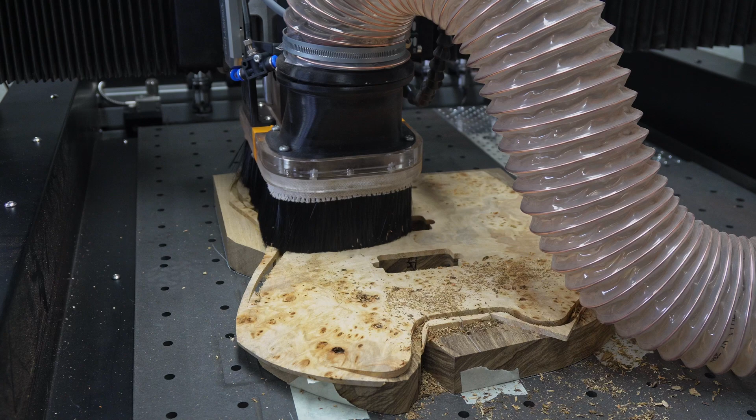Today I want to take you through my process for cutting one of my guitars on the CNC. I'm going to start at the very beginning, cut step by step, and especially focus on the cam, like what kind of tool paths that I'm using, what tools am I using, how fast am I going, and all of this I am doing, of course, on my brand new CNC. So this should also give you a bit more of an idea of what this machine is capable of.

I'm going to start off with the body blank. I'm going to cut the arm bevel for it so that I can do the bent drop top that I like to do on it. I'm going to show you how I do that. I'm going to glue that up, machine the rest of the body. I'm going to machine the neck on both sides, as well as doing the fretboard with all of the inlay.

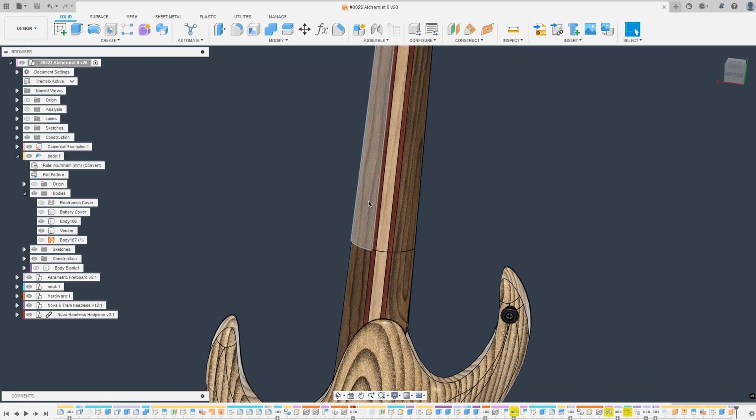So this right here is the guitar we're building. It is quite similar to the one I built here on the channel fairly recently, except this time it's going to be a 6-string version and we have a poplar burl top instead of a buckeye burl top. Other than that, we also still have a black limba body, and this time the neck will be with some walnut, padauk, and some nice flame maple. Now, all of that doesn't really matter for the cam strategies here, but I thought I'd just share with you what we're building.

What does matter a bit more is that we're using a tremolo bridge. This one here is from Nova Guitar Parts, and I'm also using their block headpiece. Usually I like to use the single headpieces, but the customer for this guitar requested this different headpiece, so that's what we're using here. And that's why also the headstock here looks a bit different than it does usually on my guitars.

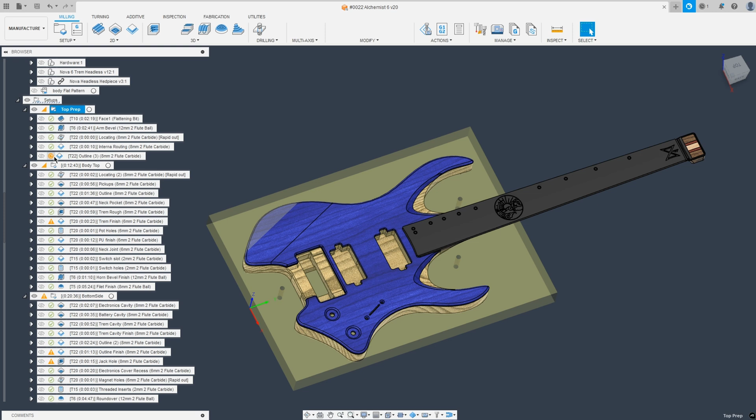Now I'm going to start off with the body and then move on to the neck and the fretboard after that. So let's hide the neck, and the very first thing is that the top here is not on there yet, and we want to prepare the stock body with all the internal things that will later be covered by the top, as well as with the arm bevel. I like to do a bent top here that follows the arm bevel nicely, and this means that I don't get an ugly line here and the beautiful top is seen everywhere.

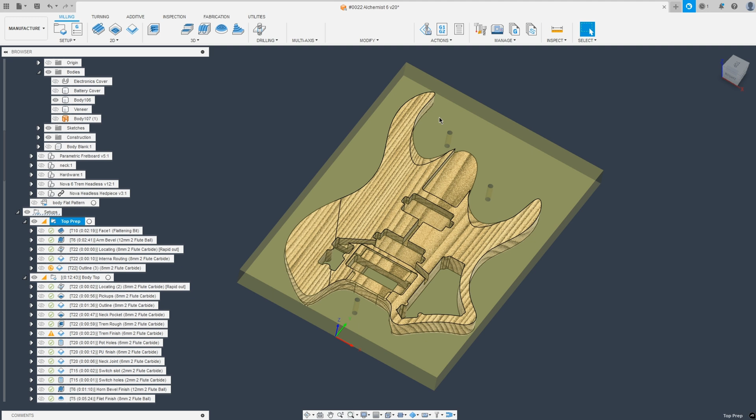So here, this is my first setup. I have defined the stock here as a separate component with the body, and this means that I get exactly what I need, and I can also have the locating holes, for example, defined in the stock, and it's just a lot easier to manage than using a fixed size box stock in here.

I'm starting off by facing the stock to thickness. Sometimes I do that separately before already. In this case, my stock was still a bit too thick, so I'm using a big 2-inch flattening bit here, so roughly 50 millimeters. This is really nice at getting a nice even flat surface, and it's pretty quick. Now you do want to make sure that your spindle is nicely trammed, otherwise you will get some step over lines, but here this works great for me, and this is definitely an operation that kicks up a lot of dust if you are not using dust extraction.

If we look in here, the spindle speed is of course slowed down quite a bit. This is a huge bit. Now even at 12,000 RPM, the surface speed is a lot faster than I usually try to aim for in wood. However, this bit claims to work up to 15,000 RPM, and I haven't had any scorching issues running it at this speed. But this is definitely something I want to keep in mind. And then the feed rate I have at 5,000 millimeters a minute here.

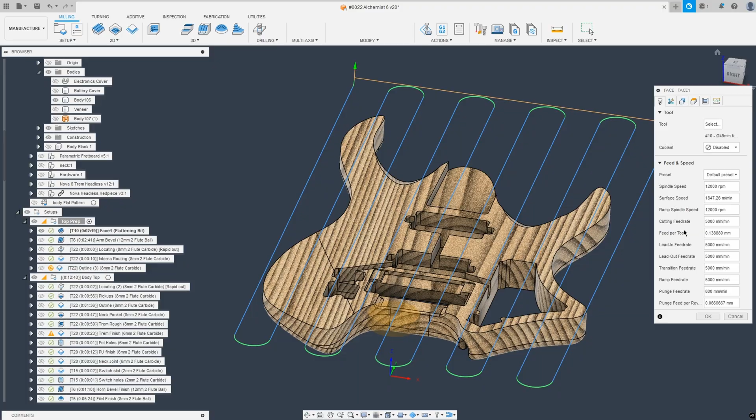I'm sorry if you work in inches per minute, but doing every single conversion here would just take forever. So if you want to follow along, it's probably easiest if you open up a millimeter to inch conversion in a separate tab.

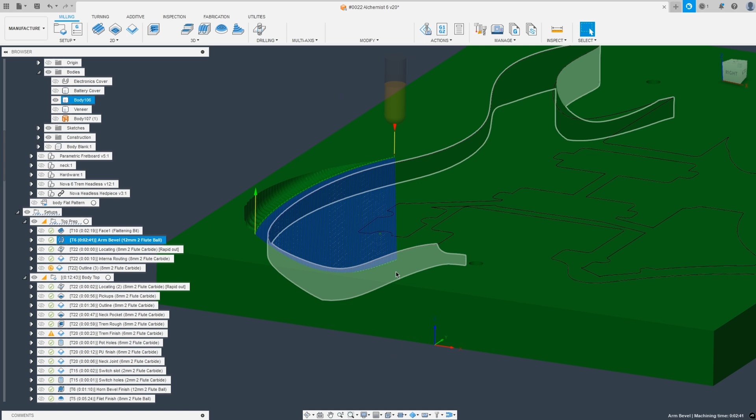Then for the actual bevel here, I'm using a parallel strategy with a 12 millimeter ball end mill, and this is just the easiest way that I've found to nicely step down. I'm doing very small step overs, so I don't have to rough anything out before, and it's a very even engagement as it continuously takes more material.

Now the main trick here is getting it to extend past the body shape, as I haven't glued on the top and I want to have a bit extra that extends nicely so that I can glue on the top, have a bit of overlap where it still glues on nicely and it follows the curves.

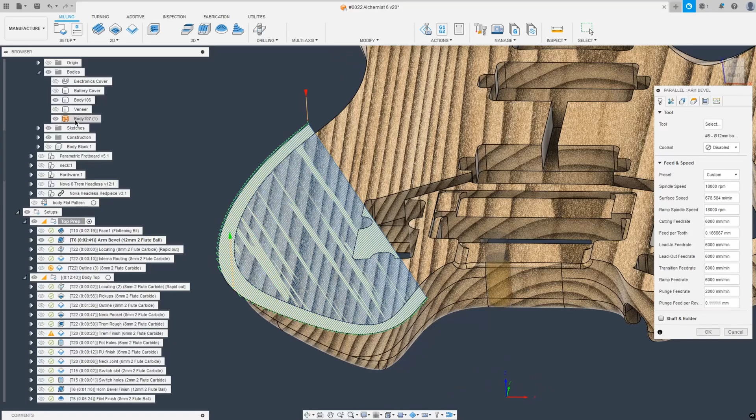Now to do that, I created a separate surface body. There's a couple of ways that you can do this. The way I get this curve in the first place is I have a sketch here that's perpendicular that I then extrude out to make the cut for the top. And I use the same sketch to create a surface body, and then use an outline sketch from the top to cut it to the shape. And it just has a bit of an offset.

Then inside of the parallel here in the geometry, I'm using the face contours of this separate surface, and I'm also using the model tab, as this body here is not one of the models of the setup. I'm including it here as the model, and this will make sure that the tool doesn't drop down off the edge. For the step over here, I'm using 0.75 millimeters.

This of course does leave some step over lines, but I can just sand those off very quickly, and this also makes sure that when I'm stepping down quite deeply here in the end, there's still not too much load on the tool at all. Then for the RPM and speed, I generally want to aim for around 550 to 650 meters a minute for surface speed. And this basically dictates the spindle speed based on your tool diameter. That's how I arrived at this speed, and that also means that the smaller the tool, the faster your spindle speed will be.

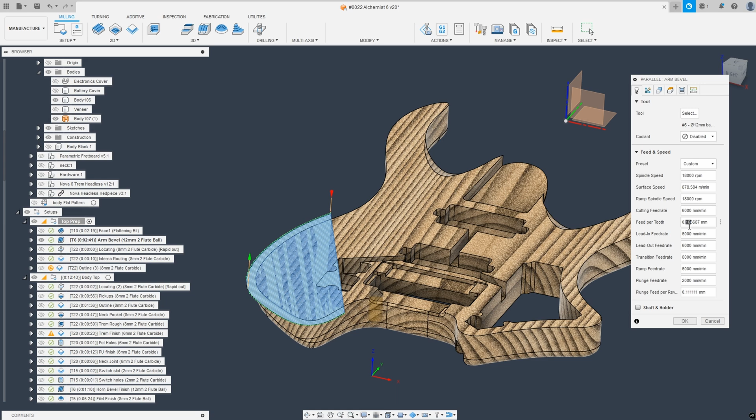Then for the cutting rate here, for wood, something in the 0.1 to 0.2 feed per tooth range is usually a safe bet. Stay maybe on the lower side if your machine is not as rigid. And then this is how I arrive at the feed rate.

After that, I'm switching to an 8mm end mill, just doing a small little drilling operation here. This gives me a hole that I will later use when I flip it over as well, but mainly for the next operation after I've glued on the top, this will be my zero point, and I can simply probe that in, and this is the easiest way to get a precise reference.

Now, it doesn't matter that I'm exact down to the micron here. If I'm within a millimeter or so, this is perfectly fine, as everything here is still oversized. I'm cutting nothing down to dimension. And even once I'm doing the internal routing here, if these routes are slightly off by half a millimeter or something, that is still perfectly fine, and you won't be able to tell.

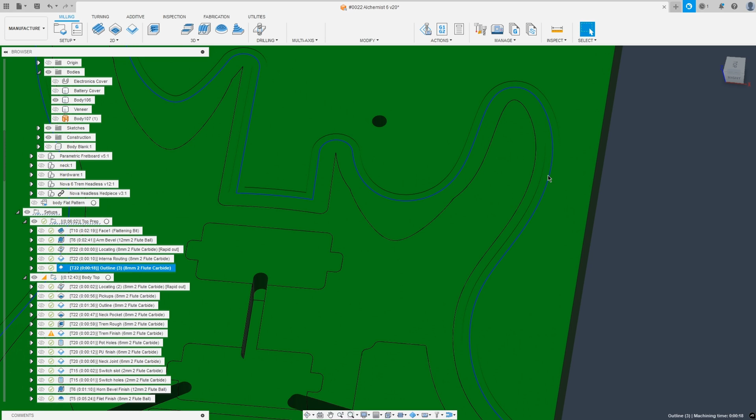Now, this outline is not following it directly, but it's mainly here as a visual guide of where I want to glue on the top. This way I can ensure that when I glue on the top, if I am covering this everywhere, then I know that I won't have a piece missing somewhere. And there's, I think, a 5mm stock to leave here on the radial, and this is just a guide that helps me line up the top, but completely optional.

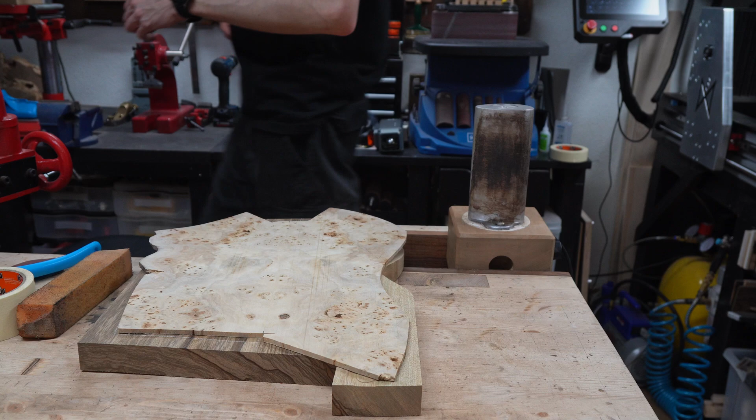Then after having machined all of this, take it off of the machine, do some light cleanup. I use the bandsaw to cut away the excess material where I will attach the bent top. And to bend the top, I'm using just some heat and steam. This I'm doing with an acoustic guitar side bending iron, but there's all kinds of different ways you can do it. Depending on the wood, like in this case, the poplar was so soft, I could have probably gotten away with just using some water to soften it, then clamping it in place, or even just forcing it in the vacuum bag. But there's a chance of cracking, so I prefer to do it with water and heat.

But if you're doing something like maple, of course, then it will require quite a bit. My tops are 5mm thick, which I find I can bend even maple still fine at 5mm. Any thicker than that, and I'm going to have a problem having it follow the curve. But I think 5mm is a nice thickness anyhow.

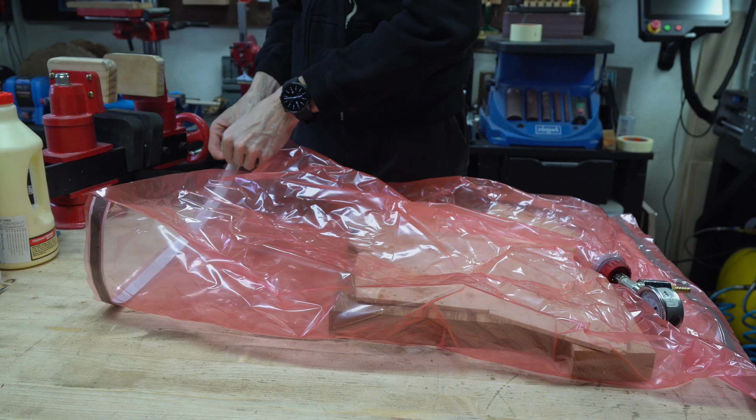And to glue it on, I'm using a vacuum bagging system here. I used to use a clamping caul, and that also worked. It's just a lot more convenient and faster with the vacuum bag, as I don't have to set up a caul and put on 20 different clamps. But if you don't have a vacuum pump, then a clamping caul will work perfectly fine as well. Then after that glue has sufficiently dried, I can move on and cut the rest of the body.

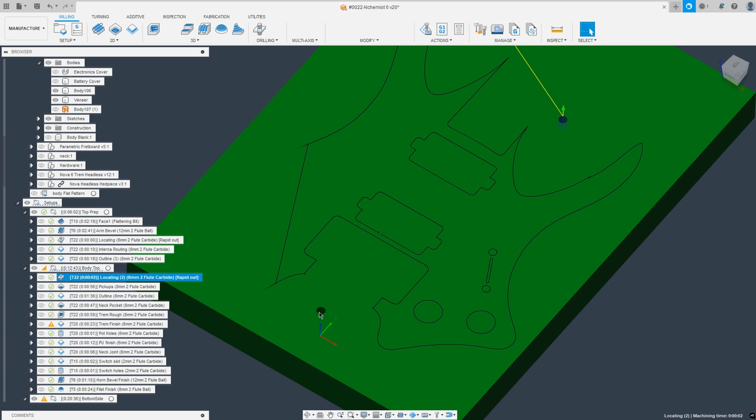So here, starting off on the top, I'm cutting the remaining locating slots and locating holes. I usually try to make sure that, well, this one down here is of course not covered. And the way I'm making sure that this is still square to the machine, since I'm only taking one location here, is I just use one of these edges as a reference, and in case I cut that edge off, I align it manually using the center seam if I have a two-piece body or something like that.

Then I move on to cutting some of the cavities. Let's have a look at just one of these adaptive operations, as they're essentially mostly the same everywhere. I'm using an 8mm 2-flute end mill here. I might switch to a 3-flute at some point. I just haven't gotten around to changing it out yet, but I got one. This will just allow me to go even faster, but usually these adaptives are quite fast anyhow, and are not the limiting factor of how long the operations take. So that's why I also haven't gotten around to it.

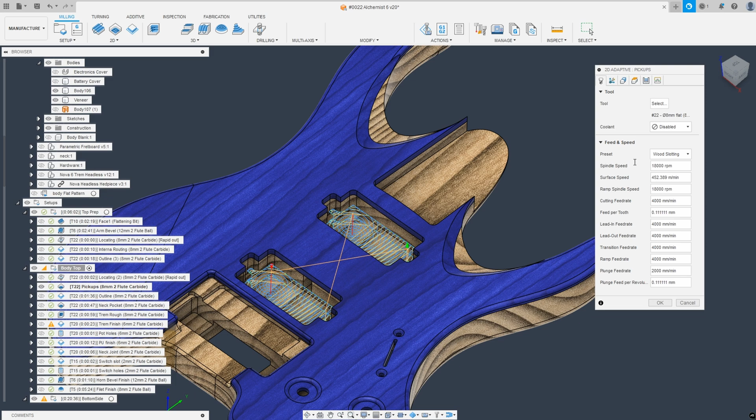Now for the feeds and speeds for my 8mm mill, I have two different recipes. One is for adaptive, where I'm just taking a side load and it's not fully encased in the slot. Here I'm going a bit faster, 20,000 RPM and 5,500 millimeters a minute. And then if I'm doing a slotting operation, I just slow everything down a little bit, and this just results in less load on the tool. It doesn't scream quite as badly. Since I need quite a bit of stick out on this tool to be able to clear all the way down, I can get some chatter and some screaming if I do slotting. That's why this is a bit slower.

Then I'm just doing multiple depths. Usually I like to do around 10mm step downs. That works quite well. And a stock to leave between 0.3 and 0.5 is what I usually like to do. Here I do a bit more on the higher side, 0.5, as later I'm going to come around, clean up the edge, and there I'm going to use a downcut end mill. This tool here is an upcut end mill, and it can result in a little bit of tear out. So if I have a bit more here, there's more meat left to remove the tear out.

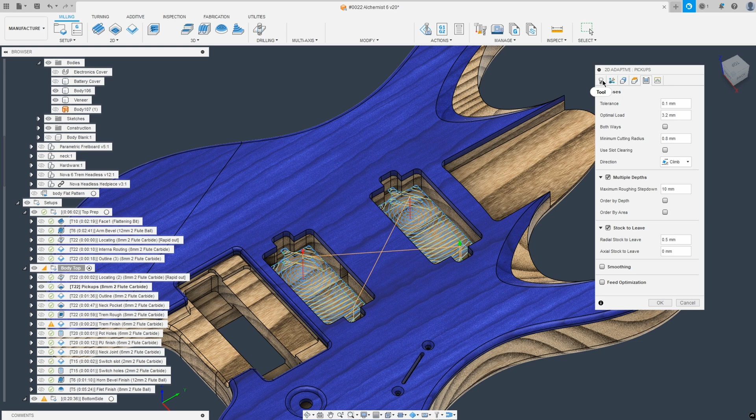The 3-flute end mill that I might be switching to is a roughing one with straight flutes and some chip breakers. I don't want to use a downcut end mill for this kind of bulk material removal, as it just packs down the chips a lot. I like to just have all the chips fly out easily and get removed. So straight flute might be a good compromise to minimize tear out while still getting all the chips out.

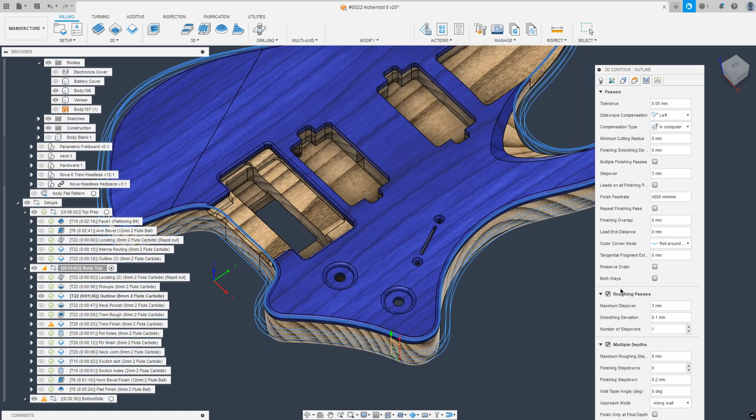Then, before I can continue with the other pockets, I'm actually cutting the outline. I'm not cutting all the way through yet. That will be once I flip it over. So here I have a bit of stock to leave. And what I'm also doing is I'm taking a roughing pass. This is not to get a nicer finish, but just to widen the slot and allow for all of the chips to come out.

Now, if you cut a slot that is very deep like this, the wood chips tend to not want to fly out. This was mainly relevant when I was still using a 6mm end mill on my Killer Bee, as I wanted to be able to get everything done with one end mill and not have a 6 and an 8mm. There the slot was even narrower, so having these roughing passes was absolutely necessary. Here with the 8mm end mill, it might not be strictly necessary anymore, but this also gives me a bit more of a gap later when I come around to do some of the roundovers with the ball end mill. So I'm doing a 3mm step over for the roughing passes and going down 2 step downs of 9mm each.

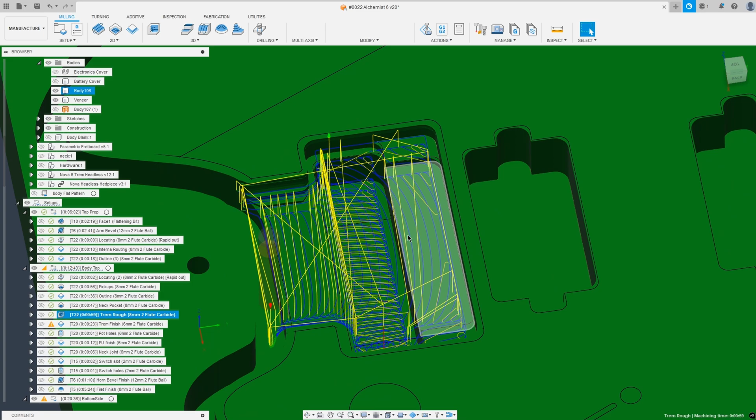Then this gives me enough access that I can do the adaptive operation here, and I can just come in from the outside. I can just rapid plunge here and cut away the neck pocket. Then I do the same adaptive operation here. Now it's a 3D adaptive that is just constrained to this area and set to only go down as far as it needs to clear everything from this side. And then I will go through all the way from the other side.

This is all still with the 8mm tool, and then I'm switching to my 6mm downcut tool to do all of the finishing. This can also get into all the corners. All of my corners here I have designed with a 3mm radius, and this means that I can get in there.

Now, if I needed tighter radii, I could of course use a smaller tool, but for basically anything I do here, 3mm is perfectly fine. So that just makes it easier. Then I also cut the holes here for the potentiometers, finish the pickups, the neck joint.

Then I switched to a 2mm tool to cut the slot for the blade switch, as well as the holes here. I stopped doing the chamfers here on the machine, as it is easier to just do those by hand with a nice tear-out-free countersinking bit.

Then final things left to do are the 3D stuff, the surfacing. So starting off with these bevels here on the horns. Now I'm using a 12mm ball end mill here, the same one that we used before to cut the arm bevel. And once again, parallel strategy, and I'm also not pre-roughing this here.

I used to rough all of my finishing strategies with ball end mills on the Killer Bee, and if you have a slightly less rigid machine, that might be a good idea to come in here with a 3D adaptive first to get the bulk of the material away and only finish with the ball end mill.

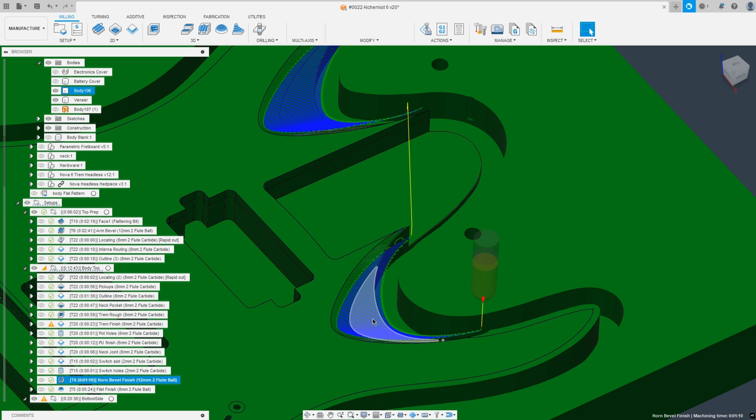But I find with a parallel toolpath, these are very predictable, and you can have a small step over and you're not actually taking a lot of load, and it is a slow and gradual ramp up and ramp down. So this works out quite well for me, and I get a pretty good finish right off the bat. Then to do all the roundovers around, I'm using a scallop toolpath.

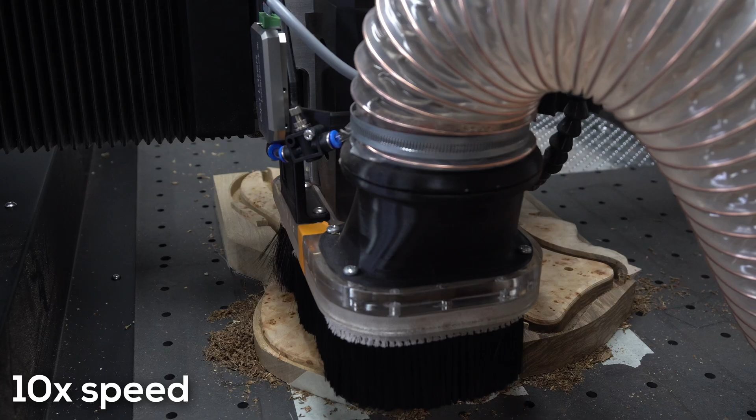I'm also using that to do the recesses here for the knobs, and that just saves me a lot of time later for sanding. Now, I will refine these curves and sand them into a perfect shape, but it just gets the job started.

Flipping over to the bottom side, I am now using all of these holes that I drilled previously to align it onto my CNC. I have a 50mm grid set up with 8mm holes on my CNC, so I don't have to actually drill any new holes here. I made sure that these ones are also on a 50mm grid.

That means I can just use dowel pins, probe the hole that aligns with the one here beforehand, and then flip it over and align it with these pins. And that gets me to a repeatability of like 0.1, 0.2mm fairly easily.

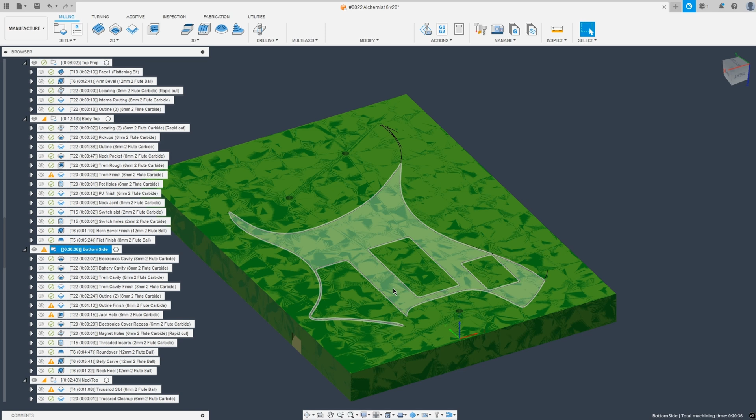If I needed something more precise, I could build proper fixtures, but since I left a bit of stock to leave here on the contour and everything else, like woodworking here, I'm gonna sand everything later, so like 0.1, 0.2mm precision is more than enough for me.

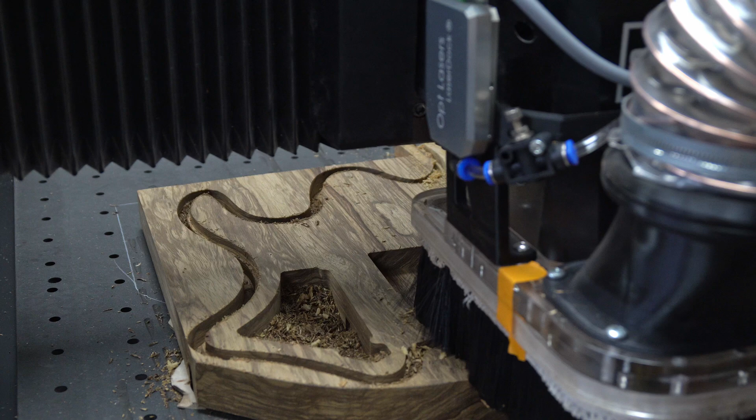On the other side, it's basically more of the same, starting off cutting out the bulk of the material with some adaptive roughing strategies. And same thing for the battery and the trem cavity. Then doing some of the finishing. And then I cut the outline now from the other side also to roughly the middle point. And this now frees the remaining stock around.

So, by the way, the way I'm holding on to this after I flipped it over is the same as always. I'm just using masking tape and super glue. So I apply the tape to the piece, make sure to burnish it down really well. If you just lay it down there and lightly press on it, it doesn't hold nearly as well.

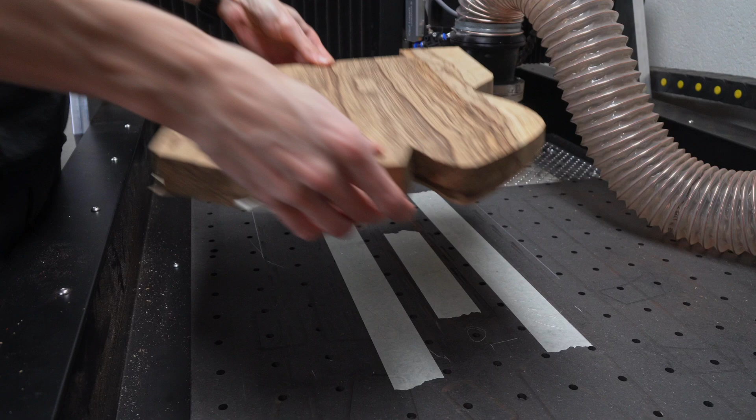You want to push on it either with a tape roll or with a separate roller and really push it on there, and then it actually sticks really well. You also have to, of course, make sure that it is flat, but we surfaced this surface here beforehand. If you just get a body blank in, they might have a slight twist to it, and then this tape thing is not going to work really well, as it might not lay perfectly flat on your CNC bed.

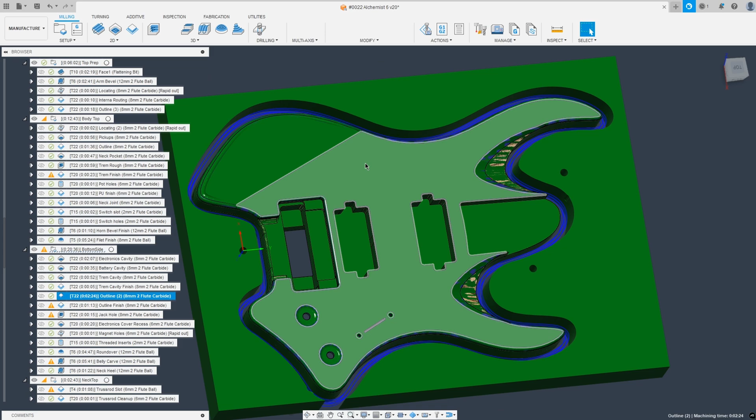Now, when I flip it over, there's a lot less surface area that will be contacting it, especially after I remove the outsides. So I usually get a nice tape strip in here around this area, and one in here, and sometimes in the middle. I found this works well enough. Some people like to leave tabs, but for me, I haven't really had any issues of it popping up, except one time, but then I did not flatten the top and, well, paid the price for it.

Then after I do the outline, also the same roughing strategy, I go around again in some coarser step downs and do the finishing passes. This now goes basically all the way down. I leave like a couple millimeters from the bottom since I have this fillet here anyhow. This just means that I don't have to cut into my spoil board.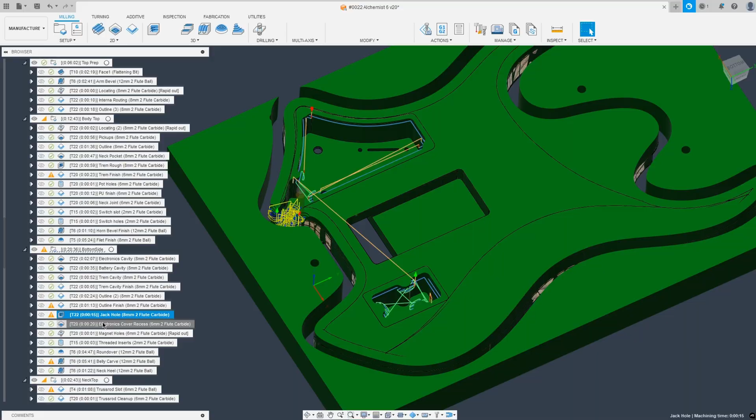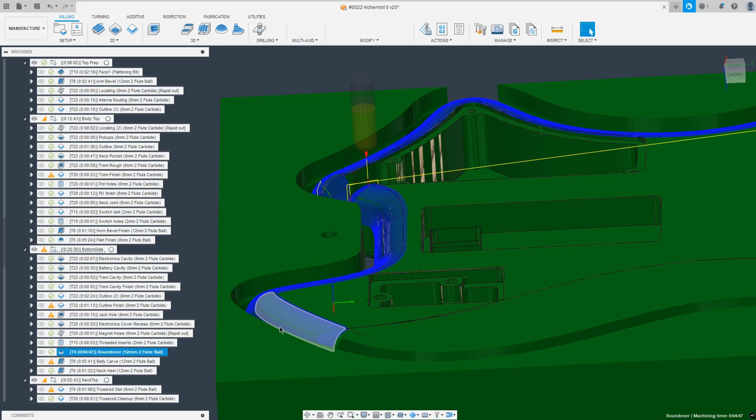Then finishing up some other housekeeping items. The little recesses for the covers here, drilling the holes for them, and then doing here the bigger roundovers. Now here I'm again using a scallop toolpath, and with scallop you want to do a roughing beforehand if there is more material that you want to remove, because it kind of goes all over the place. It starts from the outside and just kind of top and bottom and wherever. So you might all of a sudden take a lot more material in one pass than you intended to. This is kind of just on the edge of what I want to do. Otherwise, I would do a 3D adaptive before.

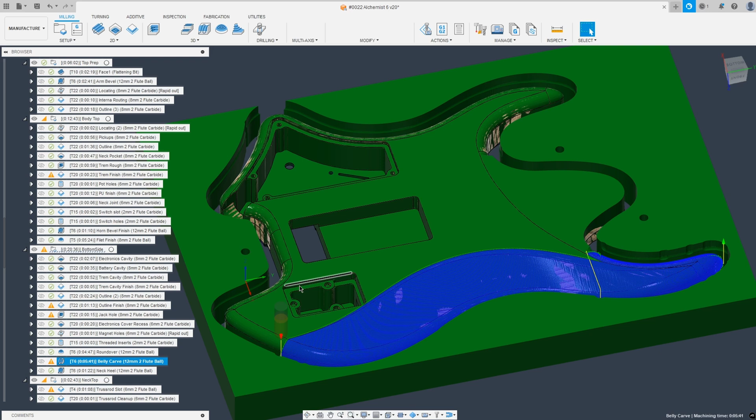I used to use the scallop for all of the different operations here, also for like the belly carve and everything. But I found that these corners here where it changes directions, if that is a concave surface that it is on, it can leave some little dimples from changing directions that are hard to sand out. So I'm just doing this scallop here on stuff that is kind of all over the place, as it is the simplest one to just constrain, just select what I want and it does its magic. Then for the nicer surfaces here, I'm using once again a parallel toolpath. This leaves a much more consistent finish that is easier to sand out.

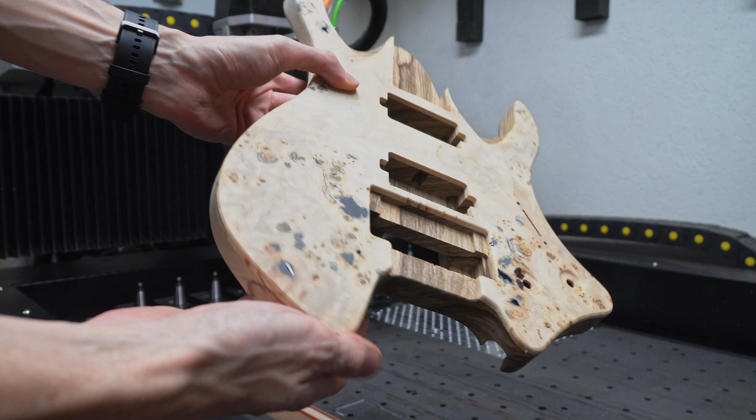Now you can also see that these finishing strategies in terms of time make up the majority. Like half of the time cutting here is just these surfacing strategies. So choosing the right step over, doing the trade-off of how long it takes on the CNC versus how much sanding it is, can save you some time. I do fairly fine step overs here, especially considering it's a 12mm tool. But then here for the heel, which I carve more by hand anyhow, I do a significantly coarser step over just so it goes faster, and I will sand all of that by hand anyhow.

And that's basically it for the body. Now I have the body completely freed. I take it off the machine, admire it, and there's of course still a lot of sanding left to do, final shaping of everything, but that is the matter for a different video. Then moving on to the neck.

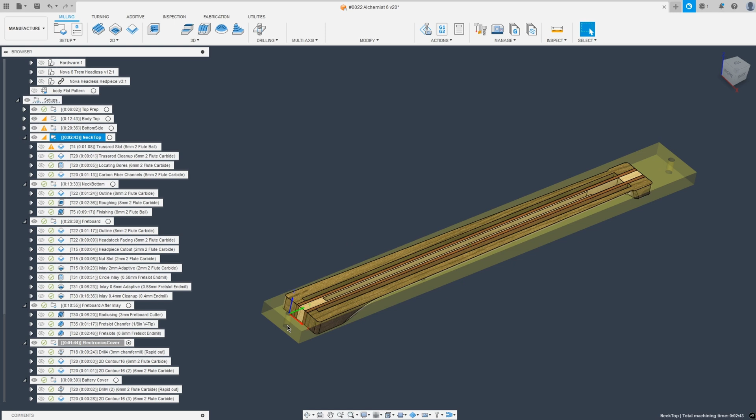I'm already starting off here with a prepared neck plank that I made ahead of time. It is for me 18mm thick, and then the width and length is just so that everything fits in here. So here I glued it up from the different materials and then used my drum sander to get it to the perfect thickness.

Then here on the top side, the main thing I have to do is a truss rod slot. For this, I'm using a 6mm ball end mill, and the reason why I'm using a ball end mill and not a flat end mill is it just leaves a nice radius on the bottom inside of the slot, and most truss rods, at least the ones I'm using, are round, so this just leaves more material there that otherwise just makes it a lot thinner. My necks are very thin, and there is not a whole lot of material left, so if I can keep a little bit more material here in the corners and strengthen the neck up more, that is a good thing in my book. That's why I'm using a ball end mill to cut that out.

Now, here for the ball end, it steps over more and it leaves a little bit of a ridge here on the bottom. So I'm coming in, cleaning that up with the flat end mill before I'm using the 6mm flat end mill as well to kind of bore out these locating holes, which I then later use to flip it over, as well as the carbon fiber reinforcement channels.

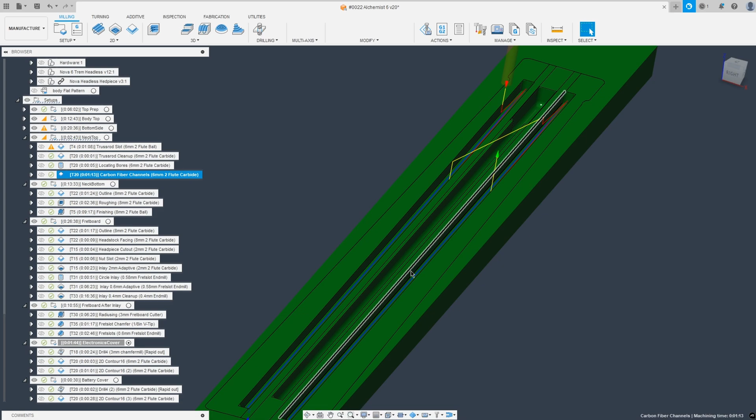I like to use 6x6mm carbon fiber rods. I found that they work quite well, and they are very readily available from carbon fiber suppliers instead of luthier suppliers, which means that for a meter I pay $10, and a meter is enough for one neck, instead of the like $20 to $40 you pay for the same thing from a luthier supplier.

Then after this quick top operation, I'm using these two holes again to flip it over as you have seen before. Once again, using masking tape and super glue to hold it in place. And then on the bottom, starting off with the outline, this cuts everything free and defines the outline. Now, depending on what material I'm using, here I'm using the 8mm end mill, since I have walnut here on the outside, which is not very bad for tear out and chipping.

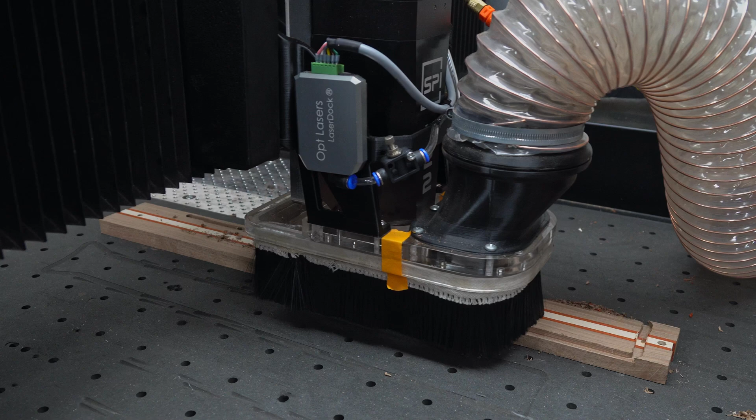But if I'm using Wenge, for example, I like to use the downcut end mill instead. In my machine, I have a 6mm downcut setup and an 8mm upcut. So if I want to have the downcut, I just would use the 6mm tool. But it doesn't really matter here what the diameter of the tool is.

Then for the neck profile, I'm not going directly to the finishing pass, but I'm doing a roughing pass first. Maybe that's not necessary, I just have it in here for nostalgia reasons, I guess, but the time it takes to rough compared to the finishing is so little anyhow, but maybe in the future I will not do these roughing passes anymore. But if your machine is not super rigid, then it's definitely a good idea to do the roughing first. This just means that the finishing tool doesn't have as much to remove.

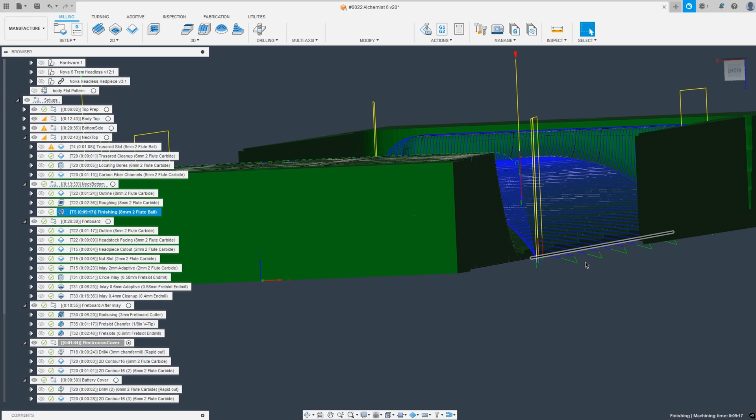Then here I'm finishing with an 8mm ball end mill. The reason why I'm not using 12mm is that in order to get all the way to the edge here, the tool actually dips down below the neckline, and this is necessary to get this shape, and this means it dips into my spoil board. That's okay. If it was bothering me, I could elevate the neck, but this is why I don't want to use the 12mm end mill, although it would leave fewer step over lines, as that would just have to go down even deeper. Not sure if I've actually shown you one of these finishing strategies before on the inside.

So here I'm using 24,000 RPM with the 8mm tool and cutting quite fast at 5,500 millimeters a minute. It still takes 9 minutes to surface this, but well, that's what I get for using a 0.5mm step over.

Now you can see that I have already finished the neck before I glued on the fretboard. There are two schools of thought, and the way I like to do it is do the neck and the fretboard separately and then glue them together afterwards, completely finished. This makes it much easier to hold, as I now have just a flat surface that I can easily put down to the spoil board and finish everything. And same for the fretboard.

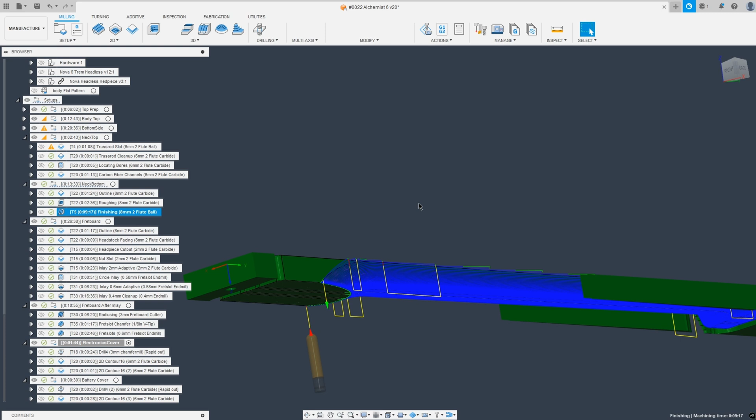If I glued the fretboard on first, then either I cut the fretboard radius first, and then when I flip it over, I now have a round bottom that needs some sort of jig to hold it in, or I leave the fretboard flat, flip it over, but then when I cut the fretboard on top, I no longer have a flat bottom to clamp down. All of this can be solved with jigs and special tooling, but for me it is just easier to do it the other way.

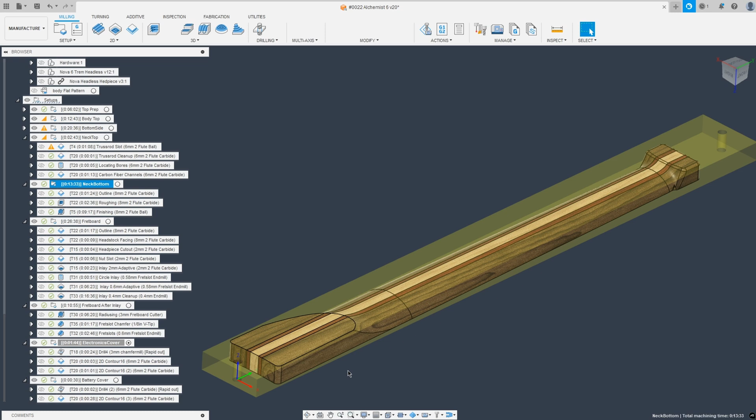Now, the advantage of gluing on the fretboard first would just be that you make sure that it is already perfectly straight, and then after you have cut it, it will not move again. This can save you some time flattening it later and simplify it in that regard. Also, getting the clamping pressure perfectly even on this surface can be a bit hard without a vacuum.

Now that I have the vacuum, I haven't had any issues anymore with the edges lifting up, but otherwise, if you just put clamps here in the middle, on the edges there's not a lot of force holding it against the fretboard when you're doing the glue up, and you can get a bit of gappage here on the side, which is of course not what you want either.

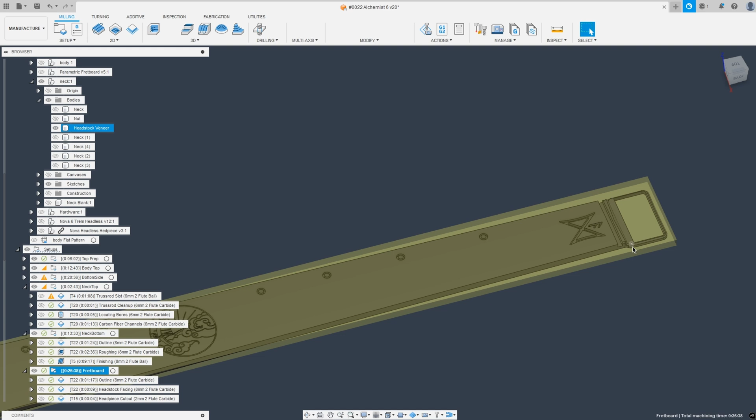This is much easier if you still have a rectangle that you're gluing together, as the clamping pressure is spread out much more evenly. Now that we have a neck, we need a fretboard to put on it, and usually the fretboard and the headstock veneer are two separate pieces for me, but since I'm using a very small headstock here with a block headpiece, I decided to keep it all in one piece.

The material I'm using here is Richlite, which is very nice to work with, especially for these thin features, as there's no wood grain where it likes to split. Now, because it is Richlite and not wood which can chip out, I am using my 8mm tool here to do the outline. Otherwise, I would definitely use the down cut end mill to make sure that I don't get any tear out.

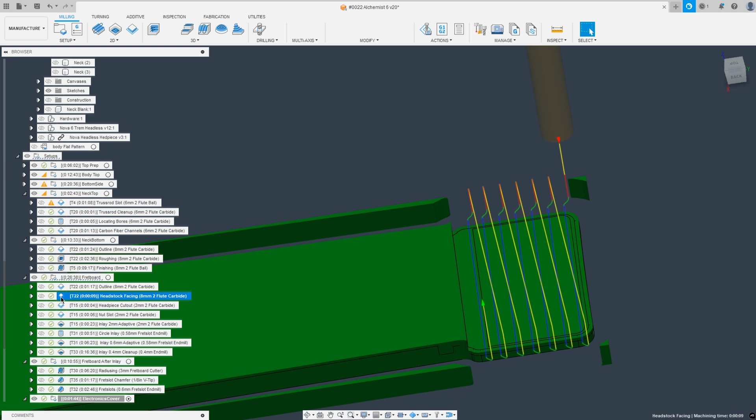The next couple of operations here are also unique to this guitar. I'm surfacing the headstock veneer here by using just a 2D contour, which is this edge here that I'm following, and then I'm just doing a bunch of step overs. This was the easiest way without creating a special sketch to constrain it and create a facing path that does not go over at all, cutting this away.

Then I come in with a 2mm end mill to cut out this inner piece. Since it's glued down with masking tape, I don't have to worry about this piece flying off anywhere. Then I'm using the same 2mm tool to cut my nut slot. The thickness I like to do for my nuts is 3.5mm, so that works quite well with the 2mm tool. I then also use this same 2mm tool to get started on the inlay.

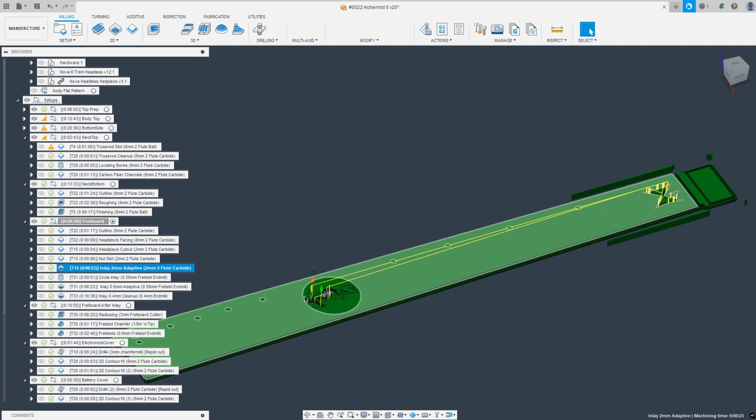The way I'm doing the inlay for this fretboard is I'm cutting the pockets and then pouring in some epoxy. This means I just need to worry about cutting the pockets. I do not need to cut the pieces that actually fit into those pockets. It's basically a cheating way of doing inlay, as you're not actually inlaying it, you're more pouring it, but I digress.

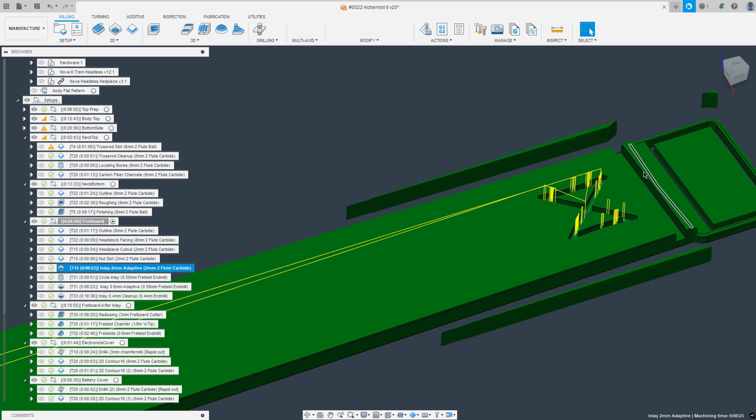I also pre-surfaced the fretboard to just slightly above my final thickness. The final thickness will be 6mm at the thickest point, so the blank I prepared is around 6.2mm. That leaves me enough material that when I radius it, I can cut away material everywhere, but also means I don't have to cut the inlay any deeper than absolutely necessary.

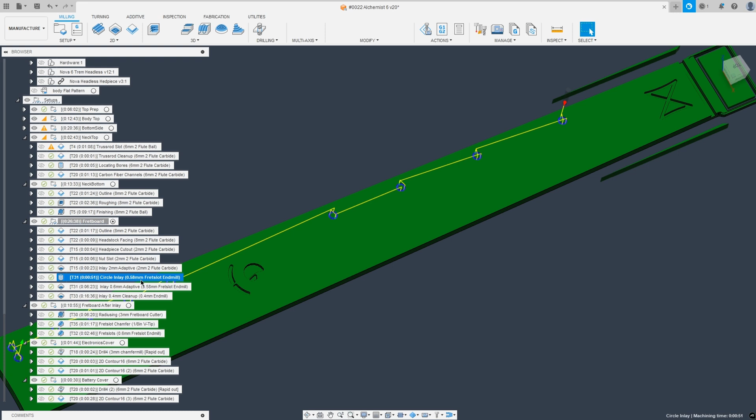With the 2mm tool, I can still go down full depth. The depth for the inlay here is 2mm at the thickest point. But later, when we move to the smaller tools, I need multiple step downs, so the deeper I have to cut, the longer it will take. So the bulk material is removed with the 2mm tool. Then I move down to a 0.6mm, or 0.58mm, tool here. This is also what I use to cut the fret slots. And then for the circles, I'm just using a bore toolpath.

The feeds and speeds here are 30,000 RPM for me because I can. Same for the 2mm tool, by the way. Even at full spindle speed, the surface speed is teeny tiny. So if I want a surface speed of 550 meters a minute, I could use 300,000 RPM, and the surface speed still wouldn't be too much. So use all the RPM you can reliably use with your spindle.

Then the cutting feed rate here is 2,000 millimeters a minute, but actually I don't really look at that too much. What I look for, especially for these very small and fragile tools, is the feed per tooth. A rule of thumb that you can use is 3 to 5% of the tool diameter as your feed per tooth number.

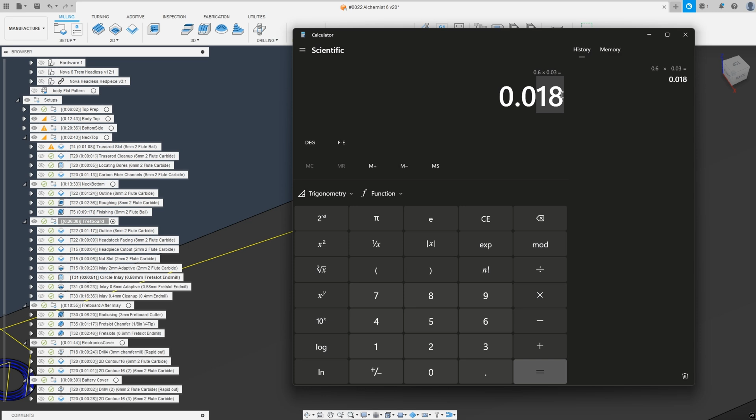So if we take our 0.6 millimeter end mill and multiply it by 0.03, we want a minimum of 0.018 millimeters feed per tooth. So here I'm slightly above, so I'm probably at around 4% feed per tooth.

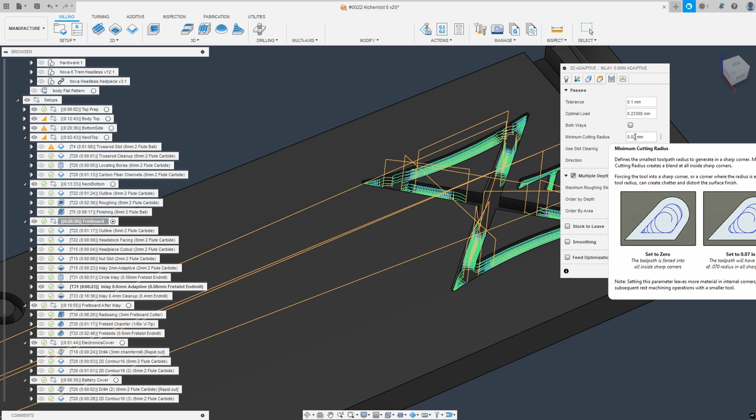But then if you just use the tool diameter, and before on the 2 millimeter end mill, for example, I might have had a minimum cutting radius of 0.1 millimeters. That means that there is actually more material left than just the 2 millimeter tool could theoretically access. This is why I'm setting the tool diameter slightly higher here. And then once again here, the step down, I have 0.6 millimeters.

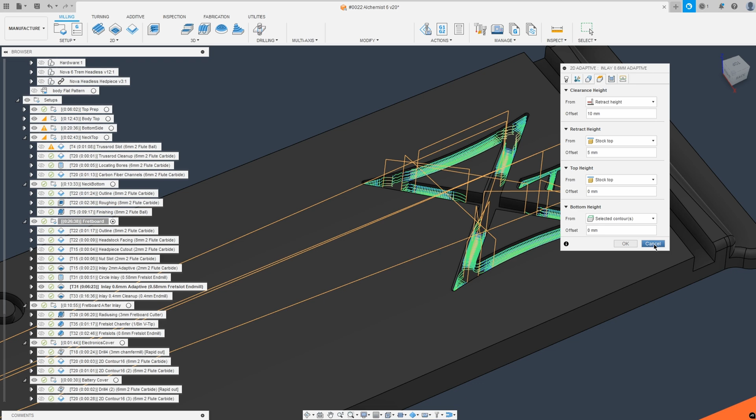And for the heights, you want to make sure that you are using the stock top as your top height, and not the model top, as we have not removed the kind of radiusing from it. So you would actually take too deep of a step down in the first go around otherwise. And while my logo looks fine like this, this inlay here still has a lot to be desired.

So I actually am going back in with a 0.4 millimeter tool here. Now I might have said 0.3 in the intro, but the benefit of the 0.4 millimeter tool is that it is available with a longer reach. And ideally, you want to design your inlay so that you are not going to use a smaller tool than 0.4 millimeters. And generally, an inlay that has finer details than a 0.4 millimeter tool can reach is also not going to look that great because it will just be too fine and get lost.

Now here I am using once again an adaptive strategy with rest machining. However, it turned out not to be the best strategy for this specific inlay design. Now, I don't usually work with line drawings like this, so that's why I didn't even consider that. But the issue here is that these lines, instead of kind of cutting them as lines with the adaptive, are cut with teeny tiny little circles.

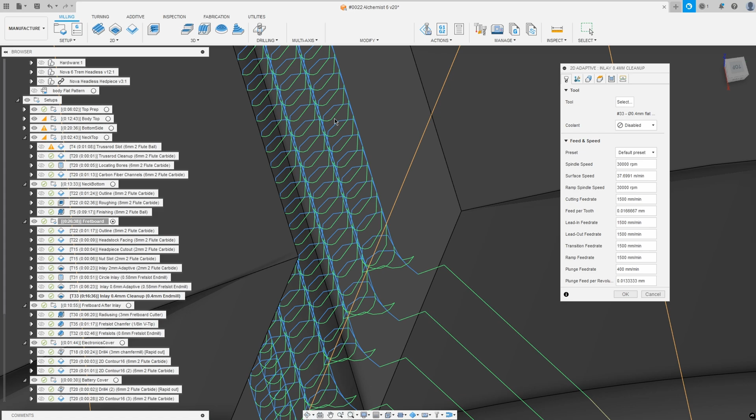And well, my machine has decent accelerations, but still, on these teeny tiny little circles, it will never reach the 1500 millimeters a minute of cutting feed rate. We will be more like in the 200 millimeters a minute cutting feed rate. Which then means instead of having the proper 3% tool load, I might have only 0.5% or even less. And this then results in you not actually cutting chips, but just making dust. And the dust doesn't really clear out properly and just kind of clogs up these slots.

And also the tool can heat up more because it is rubbing more. This actually resulted in the tool breaking here on the very last step down. Now it was still fine for the inlay. It is deeper than it absolutely needed to be, so it broke just in time.

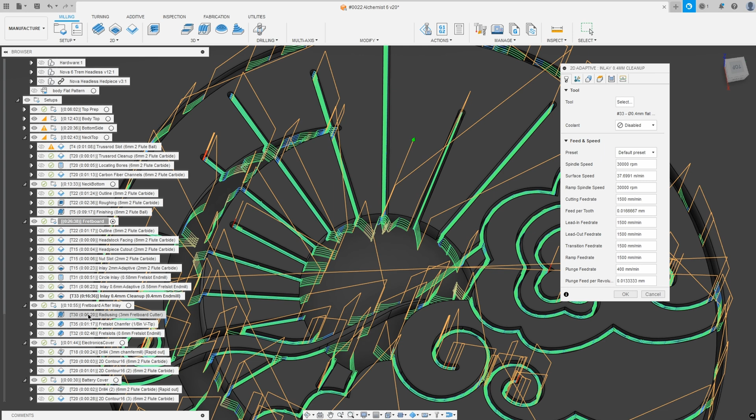But next time for this kind of a shape, I would use the adaptive with the 0.6 still to kind of get into all the corners. But then here for just these lines here, I would use a 2D contour and go around, and that would not only be safer on the tool, but it would also be a lot faster. Doing these kind of tiny swirls here took 16 minutes calculated, but I think the real time was even longer than that.

Then after all of this is cut, now before I do any of the radiusing, I'm going to go in and pour epoxy into all of this. For this one, I'm using epoxy resin with a bit of a glow-in-the-dark powder mixed in, which should give a nice glow-in-the-dark effect. Now, especially for all of these small paths here, you want to really make sure that you don't have any air bubbles trapped in there.

So I use like a tiny little toothpick thing to kind of get in there and make sure all the air bubbles are out. I'm also using a heat gun to not just pop the bubbles on the top, but also warm up the epoxy slightly so it gets a bit thinner and runs down into all of the cracks. The last thing you want to have is a nice inlay that has air bubbles on the bottom that after you surface it off, you now have a big hole that you need to fill.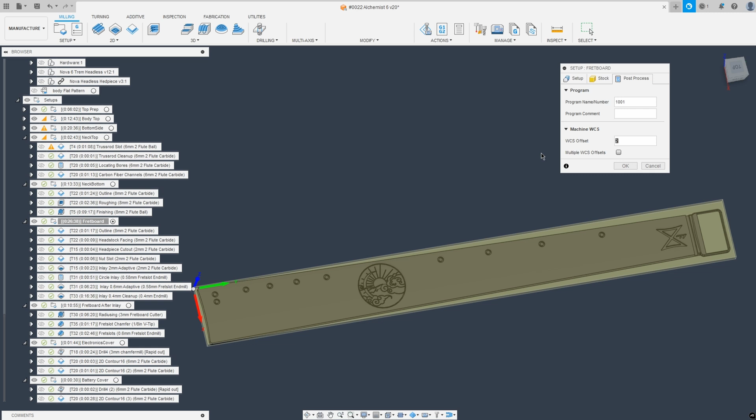Another trick, if while the epoxy is drying you want to keep continuing to use your CNC, is that usually I'm just using the G54 work coordinate offset. And if you don't know what that is, you're probably also using G54. But here, for the fretboard, I actually like to go into the post-process section of the setup, and for the work coordinate system offset, having nothing set or 1 puts it at G54, and I set a 2 here, which puts it at G55.

And what that essentially means, it just saves an additional location as the 0 point. Now, if you are probing in the 0 point, you need to make sure that you are already in G55. Otherwise, if you probe in the 0 for G54, then run your program, the 0 point will be in the wrong place. Don't ask me how I know that. But the whole point to this is that this is now saved at my G55 location.

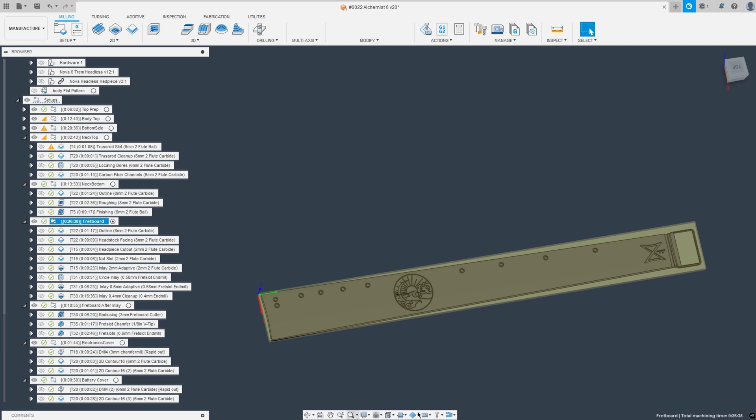And while the epoxy is drying, I can still continue using my CNC as normal at G54, and the location here will continue to be saved at G55. And then when the epoxy is dry, I can just run my other program at G55 as well, and it still has the location. And I don't have to try and probe anything in again.

You can also use this if you're doing multiple fretboards or other things at the same time. You can just continue going up. Depends on your controller how many you have available, but most controllers will have a couple working coordinate systems that you can use. So you can use G55, 56, 57, and so on.

Then after the epoxy has fully dried, and while it is kind of set after like 24 hours or something, I like to keep it for a bit longer, as the one I'm using at least tends to shrink slightly after it has already cured. So by leaving it for about a week, I make sure that the shrinkage has happened before I surface it flat. Otherwise, I've had it before where I cut it nice and flat, but then later the inlay sunk in a little bit because the epoxy continued to shrink.

Then for radiusing here, this is another area where I made some changes to what I used to do. I used to use a big, like 1-inch ball end mill. This worked quite well, and it has a nice big radius so that the step over lines are quite small.

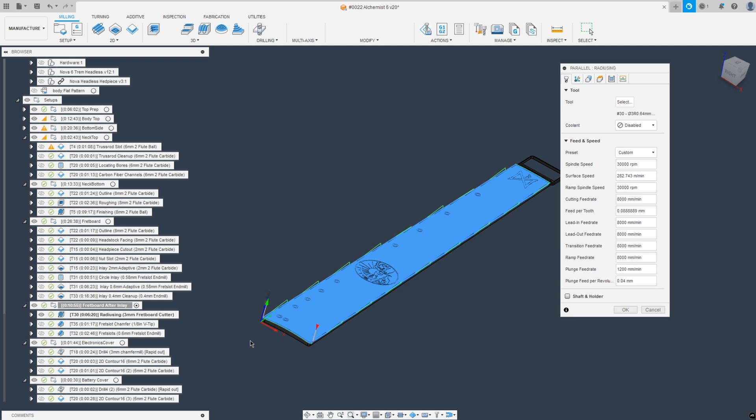However, I found a better option in my opinion, and that is also by Precise Bits. They make an end mill specifically designed for flattening fretboards. Now, originally they designed this for the Plek machines, but you can use it on any CNC machine that you like. Now, this tool is a 3mm, or 1/8 inch if you like, bullnose end mill. So it has a flat bottom, but it also still has a corner round.

Now, it also has some other fancy geometry that is optimized for this job, but that is beyond what I understand. But what this means is that if you are cutting just a very shallow radius, you can use the flat on the bottom to get basically no step over lines. But still, you are not getting sharp transition points where you are stepping down because you do have this bit of a radius.

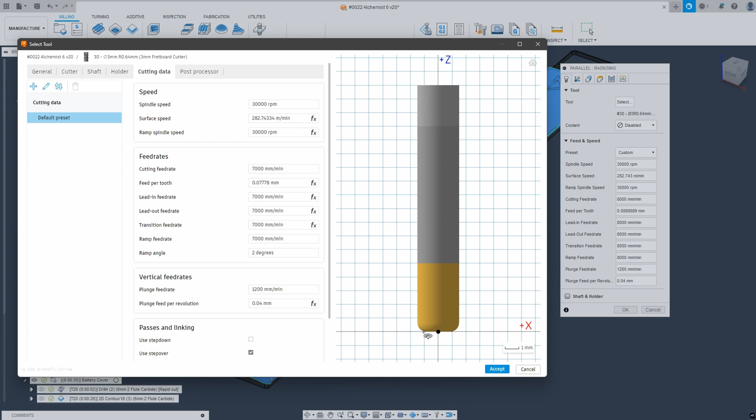This means that doing the recommended step over for this tool of 0.5 millimeters, I get basically no cusping. The result here, you can ever so slightly see and feel the ridges, especially on raking light, but if you're using wood like ebony, or especially something like Wenge, which has coarser grain, the fretboard is basically perfectly smooth already, and you will require very little sanding.

Now, because this is a 3mm tool, I am running still at 30,000 RPM spindle speed, and you can actually go really fast cutting speed. It's a 3-flute tool, and running at 30,000 RPM, here my feed per tooth is only 0.09 millimeter. I could go faster, but I'm already at 8,000 millimeters a minute, which is very fast.

Now, there's a good chance that your CNC might not want to cut this fast, so you will just have to go as fast as you can or drop down the spindle speed a bit. But this means that although I'm taking very small step overs, this still completes relatively fast.

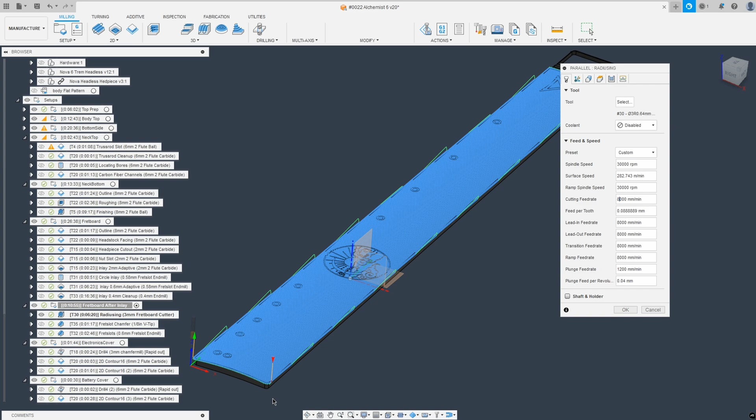Another quick trick here, because I want to be able to get nice corners, I want to cut a little bit further, but following the same radius. So once again, here in the geometry tab, I'm using just the outline as my bounding box, but then I'm using the tool outside of the bounding as my limit. This would normally cause the tool to drop down off the edge.

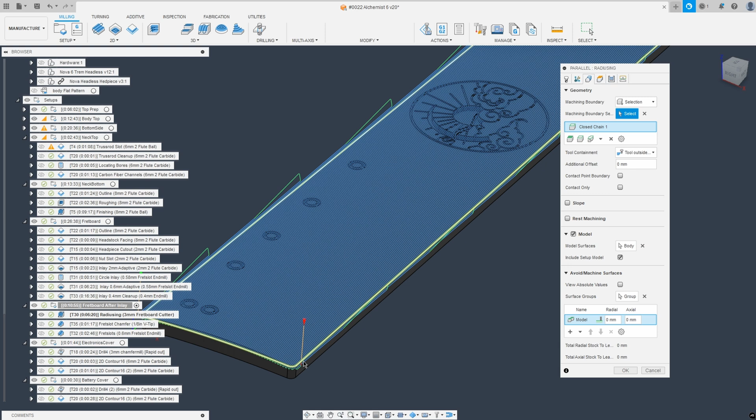But what I'm doing here is using the model. And here I once again created a surface body that follows exactly the radius. And this means that it will just keep following that. And I selected this body here. And that is just a nice workaround to get it to go all the way off of your fretboard.

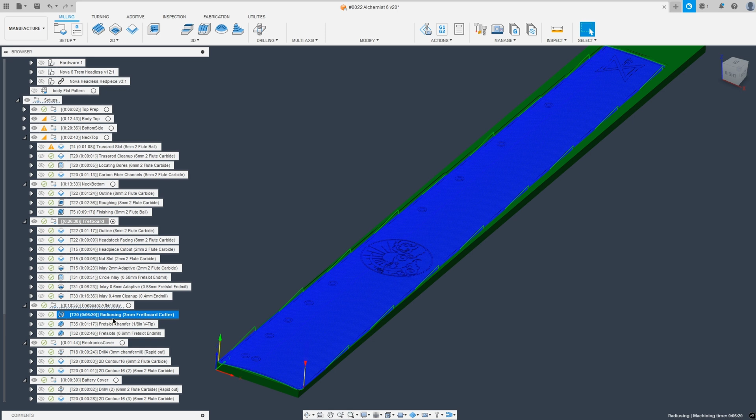With it nicely radiused, we then move on to cutting the fret slots. And once again, Precise Bits has come through for me here, not just by supplying me with some really nice bits, but especially with supplying me with more knowledge of how to do it better. I used to use a 0.6 millimeter end mill and just do tiny 0.2 millimeter step downs. I did like a dozen of them, and it took about half an hour, maybe 20 minutes after I bumped up the speed a little bit, to cut all of them.

And then afterwards I would still have to go in and nicely chamfer all of the edges before I install the frets. Now, instead of that, I am starting off with a 60-degree V-tip tool. It is a tool designed more specifically for scribing like that. And the main difference here is that the little flat spot at the tip is quite large compared to an engraving tool.

If this tip is too small, then your feed per tooth might actually be bigger than the actual tip diameter, which basically means that you cannot cut that fast. What will happen is that you either break off the tip or you just drag it through. So having a slightly wider tip diameter here is really nice if you are just slotting through.

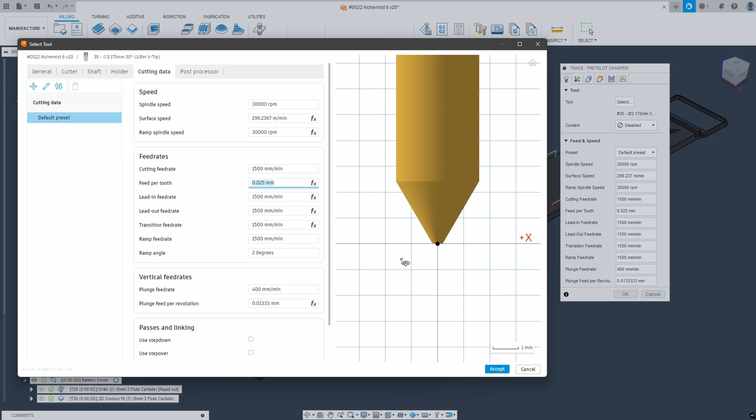So with this tool set up here, you can see that I actually did not model the fret slots in here. Instead, I have a sketch here where I took the fret slot locations and then projected them onto this surface. And then that gives me these fret slots as just a line that I can then follow.

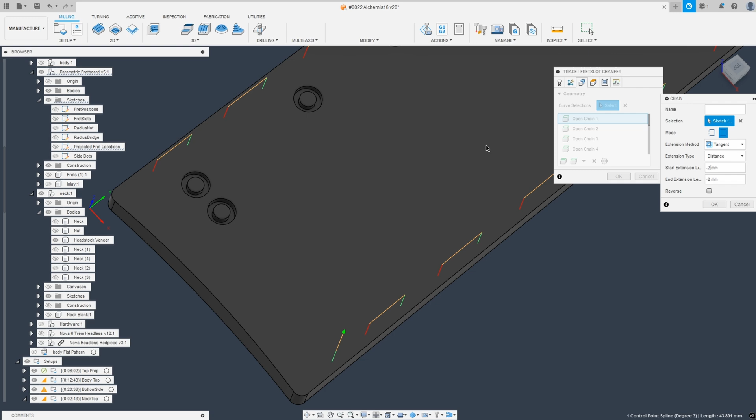Then I'm using the trace toolpath in here, selected all of these lines as open chains, and set a start extension length of -2 millimeters, same for end. This will just mean that you have a little bit of fake binding that will hide your fret tangs. And you could also manually make sure that the sketch doesn't go as far, but it is a lot easier to do this in here if you project the fret locations.

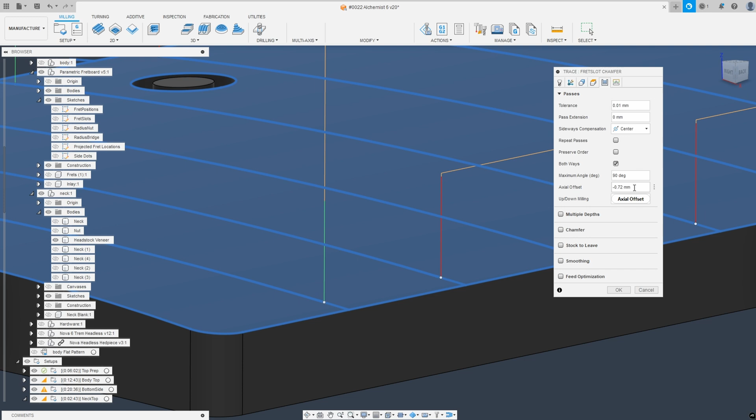Then for the passes in here, for the trace toolpath, it will by default just trace out exactly that line. So you need to set an axial offset here down. Now, how far down you need to go, you kind of need to use some math, or you can make a sketch in a different Fusion file to figure out. What I want is a 0.6 millimeter fret slot with a 0.125 millimeter chamfer on either side. This results then in an axial offset of 0.72 millimeters that I need here.

If you're using a different angle for your tool or have different widths, that might be slightly different, so you want to make sure to compute that again for yourself. Now, after this slotting tool has gone through, all of the fret slots are pre-scored. And what this does is it doesn't just eliminate the step of having to chamfer them afterwards. What it also does, and this doesn't really apply to Richlite as much, but to woods that are more prone to chip out, is by having a chamfer already, the edge is a lot stronger, and then cutting the fret slots afterwards will not give you any tear out.

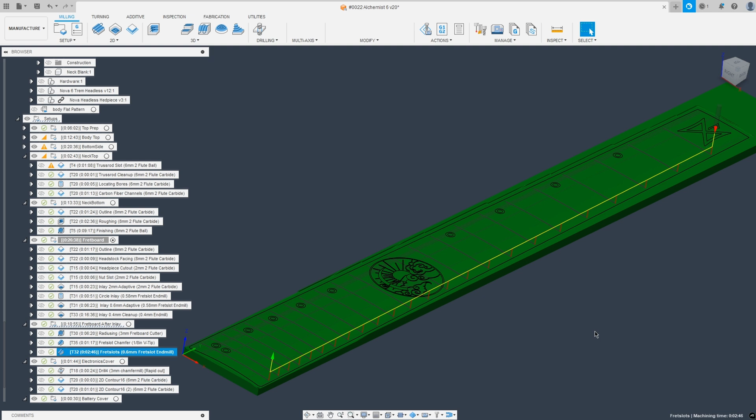So I recently did a fretboard in black palm, which is just notoriously bad for tear out, and there I definitely could have used this trick. I didn't know about it yet, but I had massive tear out from cutting the fret slots, which I then later had to fix.

Then for the actual fret slots, we already cut partially down, so I only require 3 more step downs of 0.6 millimeter step down, since we're using a 0.6 millimeter tool, and then I'm going down to a final depth of minus 2.75 millimeters. This is deeper than I need to go, but I will later still flatten this fretboard, and I just want to make sure that I'm definitely deep enough. I'd rather go a bit deeper than I need to than have a fret slot that is not deep enough in the end.

So here I'm still using 1500 millimeters a minute of feed rate at 30,000 RPM, and that results in the actual cutting of the fret slots being only roughly 3 minutes, plus another minute for the chamfering. So 4 minutes to cut the fret slots versus 20 minutes or more that I was using before. That is an incredible improvement in just time it takes to cut this stuff.

This covers all of the major components here of the guitar. Now there are still a couple other little covers and things that I like to do sometimes, but this video already is very long and I'm definitely tired from talking, so I'm gonna cut it off here. Now there are a million different ways that you can skin the cat of cutting something on the CNC. If you ask 10 luthiers who use the CNC how they do the strategies, you will definitely get 10 different answers of doing it in different orders, different philosophies, different ways of holding it down, different ways of locating, all of that. But I hope you got some ideas of what you might be able to try for yourself.

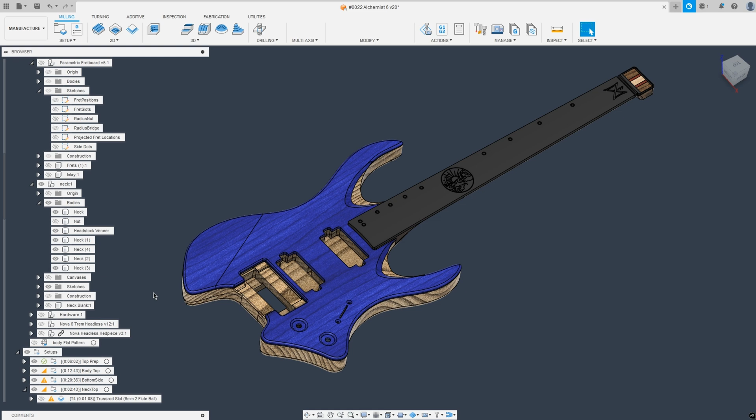I'm always evolving my own process, and if you ask me again in a year what I'm doing, it is very possible that I will have different strategies than what I showed you here today. And with that, here we are, all of the components are here. Now the next steps are going to be gluing up the fretboard to the neck. I'm going to use my vacuum system for that. This allows me to have even pressure on it and make sure that everything's nice and tight. And then I'm going to sand everything, glue in the neck, build the rest of the guitar and all of that good stuff.